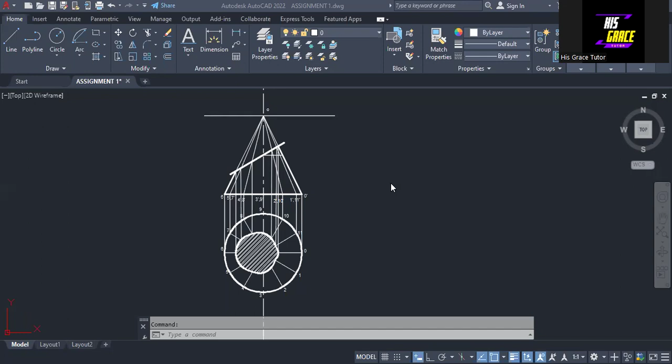Here we continue with this work as we have been able to draw the front elevation of a truncated cone, and then we have drawn the complete plan as you can see it here. Now I want to work on the end elevation, so let's start with that.

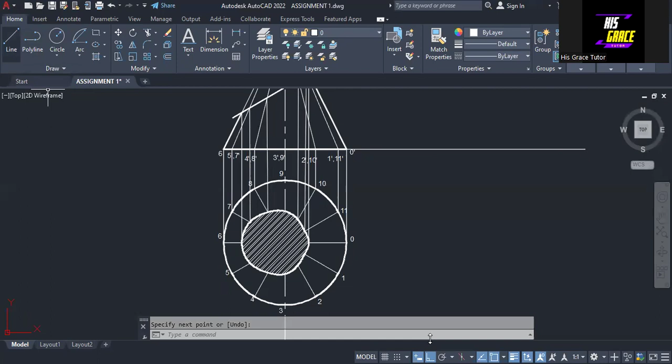First we are going to draw a horizontal line from this point on the front elevation to this side, and then draw a line at an angle of 45 degrees to the horizontal or to this vertical line from this point. Press the tab key on the keyboard, give it angle 45 degrees, press enter. So this line is at angle 45 degrees to this horizontal line and to this vertical line.

The next thing we are going to do is repeat the line. From this point I'm going to draw - let's put it on auto mode. I will draw a vertical line so that we touch this line here, then we repeat it and draw a horizontal line.

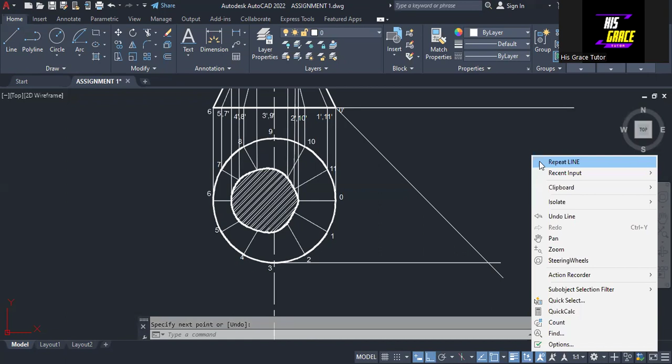This point here is meant for 4 and 2, so I'm going to draw a horizontal line from here. Then for this point 1, it's for 1 and 6, 1 and 5, so we draw a horizontal line like that, and then we draw a horizontal line from this point.

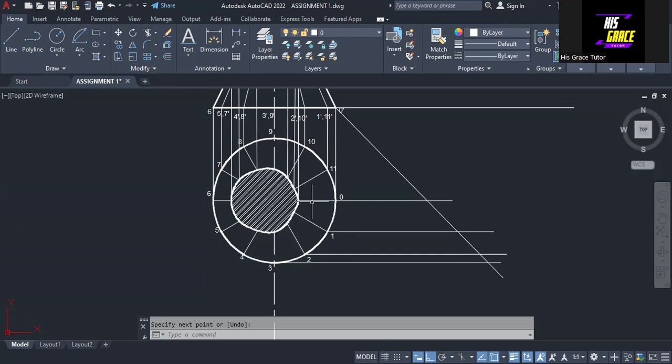This is supposed to be a center line, so let me make it a center line at once. I already have a center line here, I'll just match it. I'll click Match Properties, select the source, and then select this one. I think it's already the center line, that's why it didn't work. Okay, so we have it.

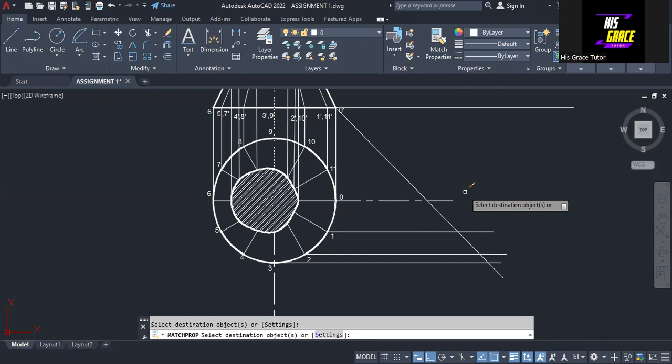From this point also, this point is for 7 and 11, so here I will draw a horizontal line, and then I will repeat this. This point is for 8 and 10, so we draw a horizontal line.

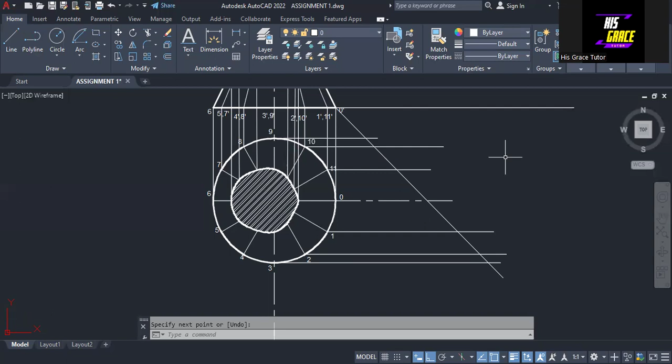The last one is this point, which is for 9, so we draw a horizontal line. The next thing I'm going to do here is break off these excess lines. So I'll break this off, and then break this off.

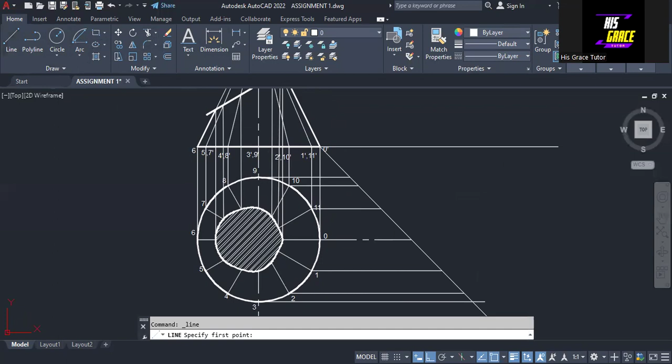Next, from this point here, I will draw a vertical line, which is going to be a center line, to this point. I will extend this horizontal line for us to get the apex of the cone at that point.

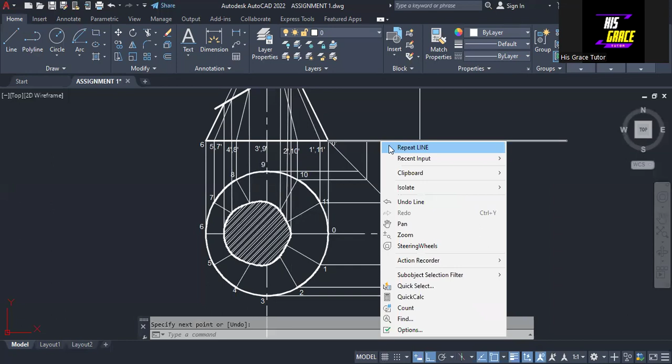Then from this point, I will draw a vertical line. Then from this point here, I will draw a vertical line. Also from this point, a vertical line. And from this point here, a vertical line. Then from this point, a vertical line. Then lastly, from this point, a vertical line.

Next I'm going to make this line a center line. I'll click on Match Properties, select the source, then select this. So that is the center line.

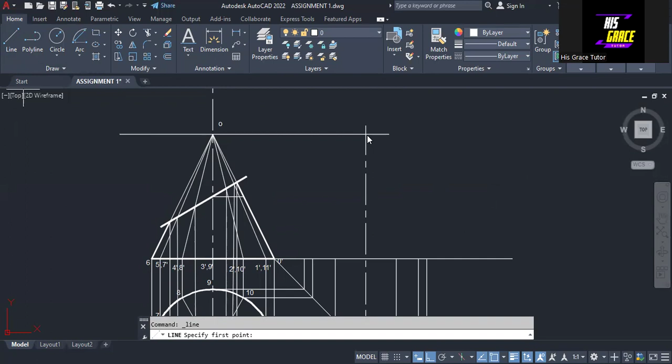Next, I'll come to line, and draw a line from here to meet this point. Then from this point, I will draw to touch this point, and again from here, draw to touch this point. Then I will also join from here to meet this point.

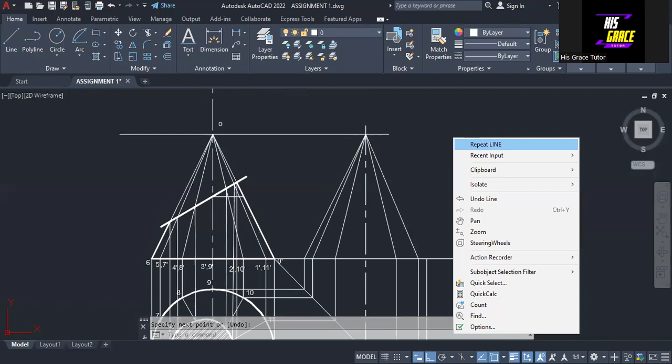So I will repeat it, from this point to this point, then from this point here to this point. So we have this now.

Next I'm going to draw a horizontal line from this point here to pass through this. Let's look at that - from this point, this is point 6, so I'll draw a horizontal line from here like this.

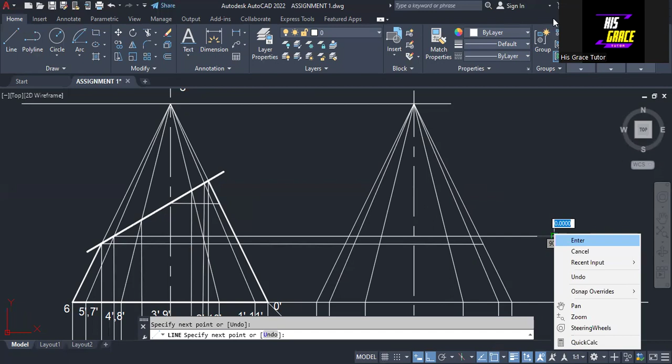Then I'll repeat it. From this point, this is for 5 and 7, so draw a horizontal line. I'll repeat it again - this is for 4, 8, so draw a horizontal line. Then this point is for 3 and 9.

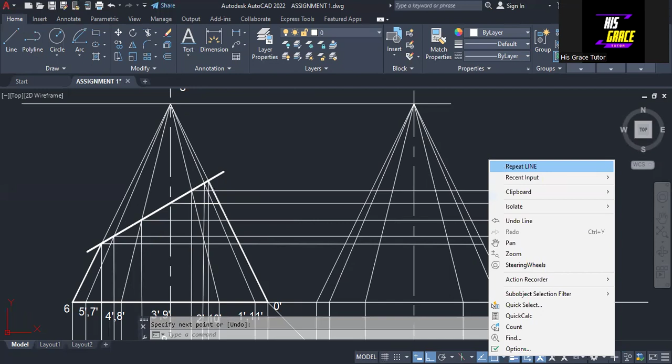Okay, so this point is for 2, 10. And then this point here, let's make it more visible. This point here is for 1, 11. And then lastly, this point is for 0.

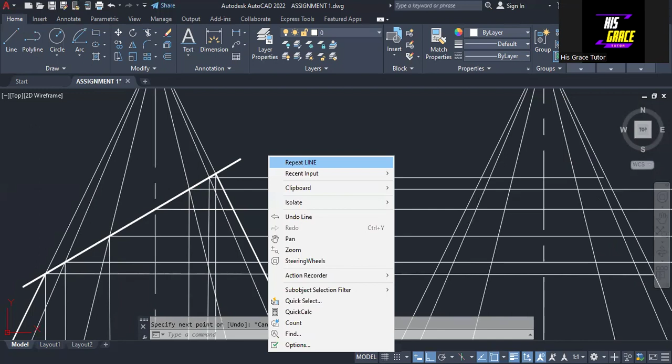So I draw a horizontal line from here, going like this. All right, so we have that.

So I'm going to number the base so that I can easily locate the point. Let's quickly do that.

So I'll be copying this. Put off the auto mode. So right click and copy selection. So this is the one. Okay, sorry.

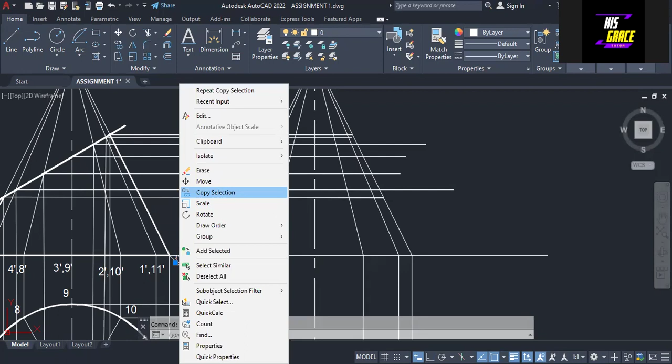So I just pick from here. I drop one here, drop one there, drop one here, one here, so one here, and here.

All right, so I'm going to edit each of them, starting from here. This point is 0, so I leave it as 0. This point is for 1, 11. This point here is for 2, 10. This one here is for 3, 9. This point I will have here is for 4, 8.

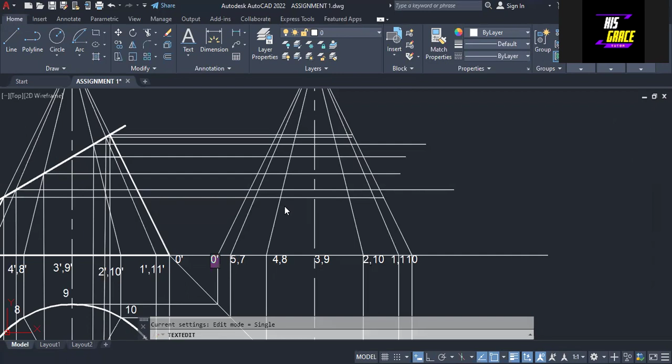Then this point is for 5, 7, while this point is 0.6. Oh, there's an error here. Sorry, I didn't follow. So this point is 0.9. I'm going to edit. I will pause and read the edit.

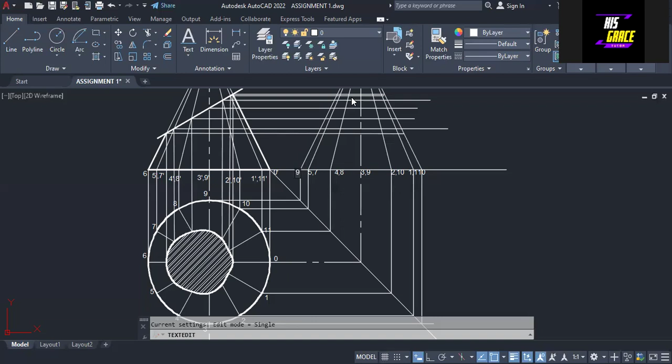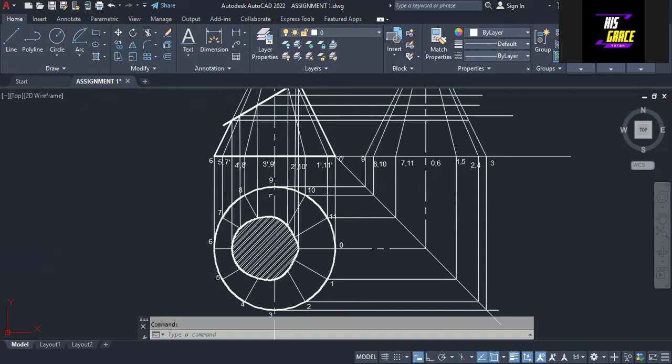So I've renumbered this, okay. As we have here, this is 3. Here is 4, 2, 2, 4. Here is 1, 5. Here is 0, 6. Here is 7, 11. And this is 8, 10. Then we have 9. So that's how we are supposed to have it.

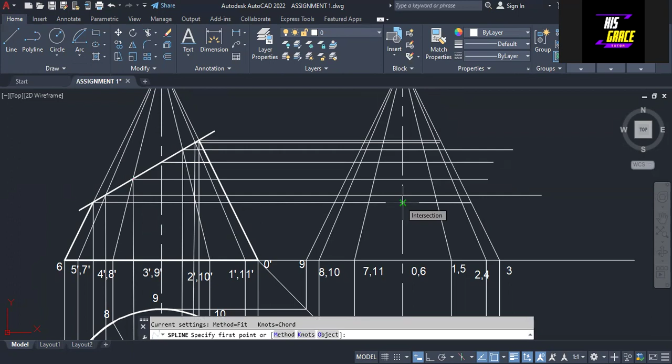So now let's locate the point. As we have here, I'm just going to click on the spline fits, and this is point 6. Or let me go and start from 0. So this point is 0. As we have here, this is point 0. This is point 1, and this is point 2.

Here is point 3. This is point 4. This is point 5. Here is point 6. This is point 7. This is point 8. This is point 9. This is point 10. This is 11. And then back to 0.

So don't just drop it. Press the C key on the keyboard and press enter. All right, so that's the shape that we have there.

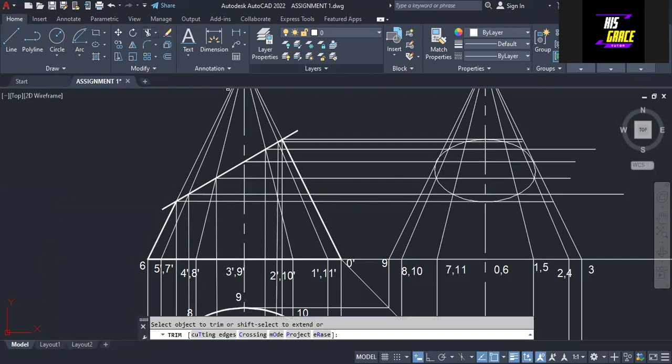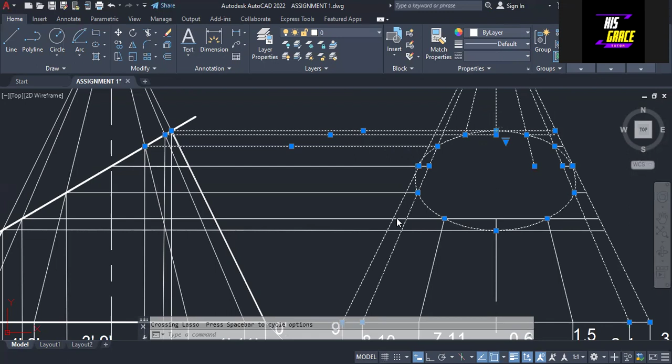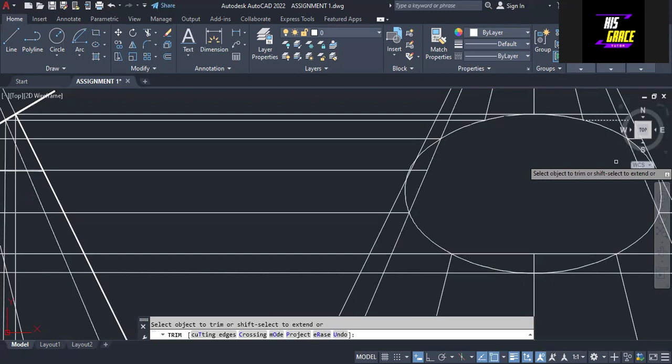All right, so I'll trim this off, and I'll trim this, and here I'll trim this off. So putting this. All right, so that's what I need.

Then the next thing I'm going to do is make this off to the shape clearly. Then we are going to hatch this surface. So I will click on hatch, select this, then I will click on this surface. That's it, so we have it there.

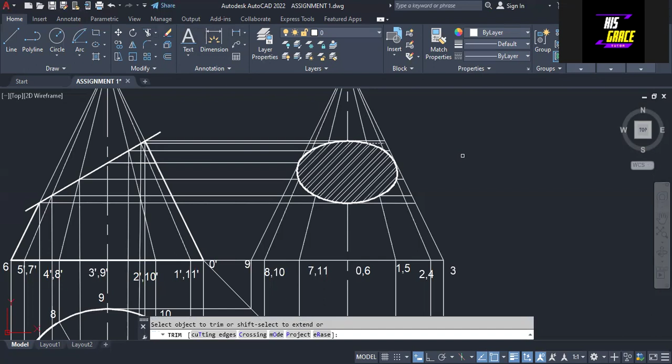And then I still need to do some things there. I want to make, so I'll break this. So this line I'll break it. And then I'll also break this line there. All right, so...

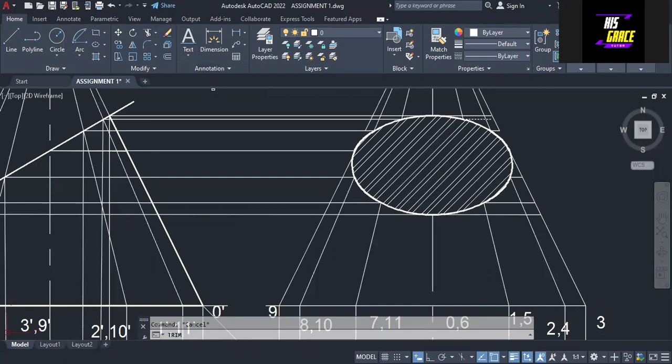Okay, so that's where you are supposed to have it. So then this line, I'm going to make them thick lines. So I'll break off this line.

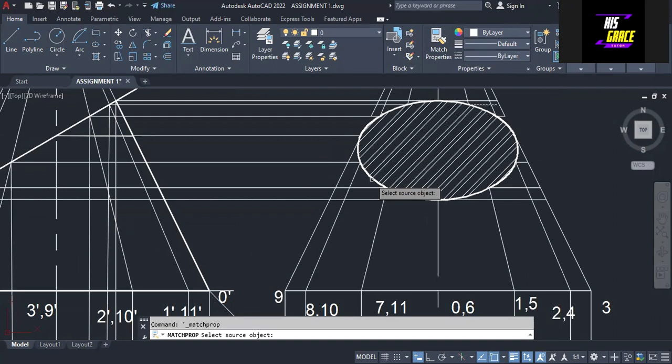All right, so now I just match this. Click on the source. So this line is a thick line. This line is a thick line. And this line is a thick line. So that's it, okay, so I have this now.

So this is the end elevation, looking at the object in this direction, as simple as I've done it here. So before I go, I'm going to draw a line from here just to join this point together. So that's it, so this is how the end elevation will look.

So we have done the front elevation, the plan, and the end elevation, looking at the object in this direction.